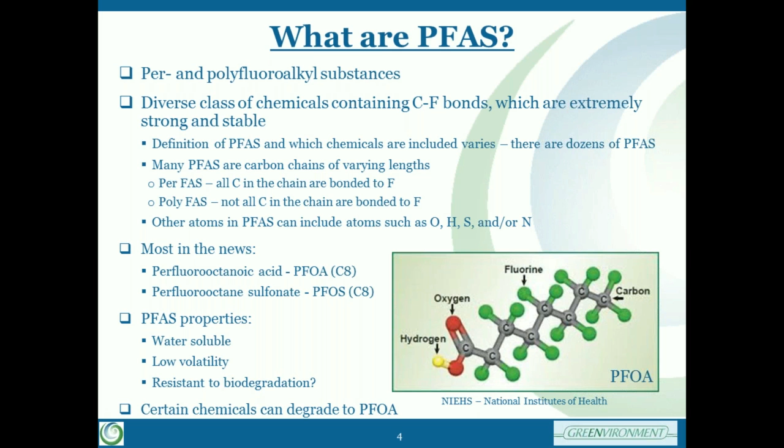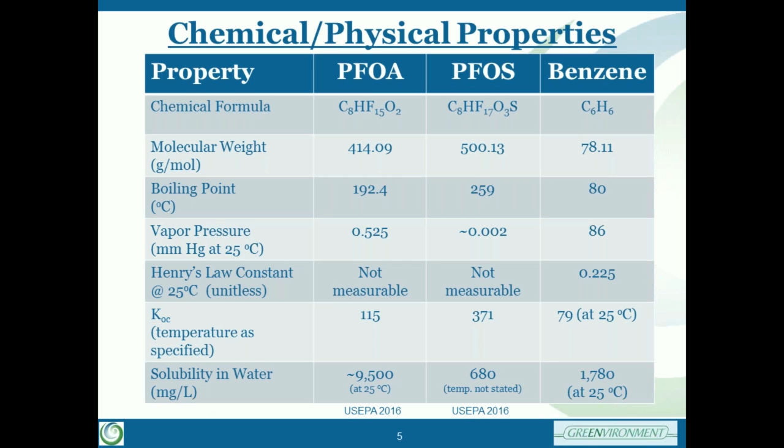KOC is a partitioning coefficient measuring the adsorbed concentration divided by the dissolved concentration. And you can see that the KOC values are greater for PFOA and PFOS than benzene. So benzene adsorbs pretty well, so PFOA and PFOS would tend to adsorb even better to things like carbon. And then finally, PFOA and PFOS have solubilities on the same order of magnitude as benzene, so this suggests that these chemicals are going to dissolve into water, which they do.

PFAS are widely used in our modern life. They are resistant to heat, oil, grease, and water, so they have a lot of applications. They're used in industry and consumer products since about the 1950s. And the products usually contain a mixture of PFAS chemicals of varying lengths and impurities.

So you may be familiar with Scotchgard and things like that that are used to waterproof clothes, non-stick cookware, Teflon that is in sampling equipment, takeout containers, a lot of different products. It's also used for wire insulation, in paper and paints, firefighting foams. You can hear about a lot of sites that are caused by firefighting training areas, and they're also used in carpeting and furniture.

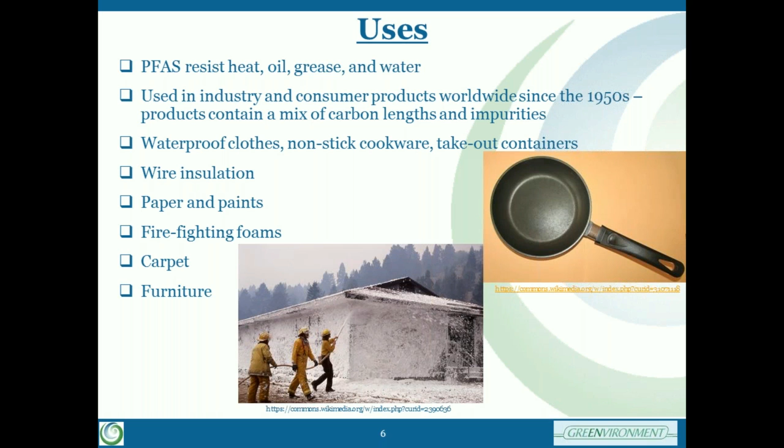PFAS are found worldwide in the environment, wildlife, and humans. They're even found in the Arctic and Antarctic. And a 2015 study showed that PFAS were found in 97% of human blood samples that were tested.

The widespread occurrence really came to light as a result of Safe Drinking Water Act testing just a few years ago. And PFAS were found in 66 water supplies serving more than 6 million Americans in 33 states. And these cases had at least one sample at or above EPA drinking water health advisories.

Now, concentrations of concern are very low for these chemicals. And as a result of that, it's common to see large dilute plumes of PFAS at concentrations exceeding safe levels. So it's an extremely challenging problem just because of the sheer volume of water that's involved often.

And there are a lot of difficulties in sampling due to the need to get down to low levels and to avoid cross-contamination from things like Tyvek suits or Teflon sampling gear. So a lot of care has to be taken to get good samples.

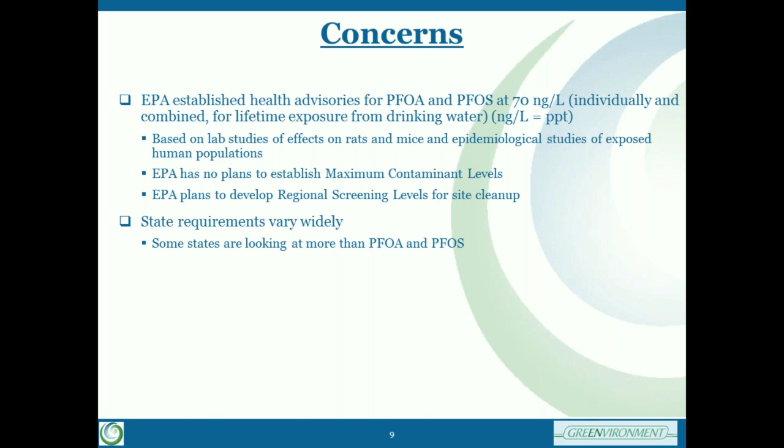So now Mike is going to talk about the technology toolbox and what is available for remediating PFAS. Thank you, Ellen. Again, as one would expect, there's a lot of research and development that's still ongoing with regard to PFAS, and therefore what we're presenting basically is the current state of technologies as we understand it.

As Ellen mentioned earlier, because of the molecular weight of the PFAS materials, some of the filtration processes and reverse osmosis processes are capable of high percentage reduction in their chemical concentrations in water, greater than 90%. And we'll talk a little more about that in the following slides. Similarly, as Ellen pointed out, some of the characteristics make it amenable to adsorption or ion exchange, and we will talk a little more about those in detail in the following slides.

Obviously, excavation and disposal is always available for these. Again, the disposal, because of the stable nature of these contaminants, you need to look at something that's got high energy to dispose and destruct the chemicals of concern. And in situ stabilization, again, with regard to isolating it from the environment with regard to leaching.

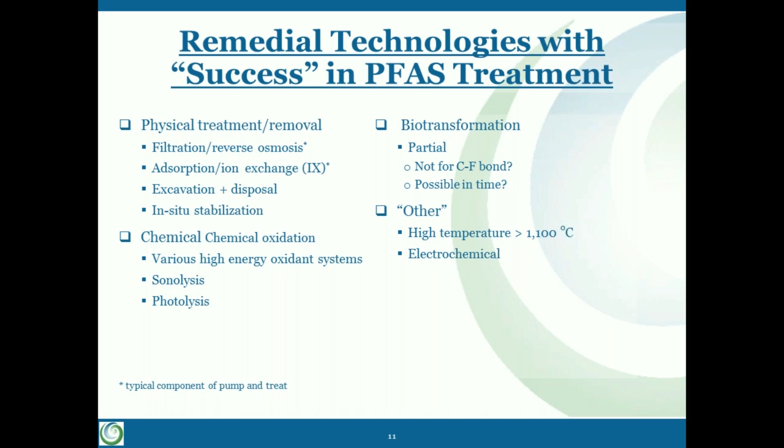Some of the other technologies, as you would expect, high energy technologies such as high temperature will obviously destroy or break down these PFAS materials. Obviously, you'll end up with fluorine, fluoride, that has its own issues to deal with, but these can be broken down under high temperature conditions. Another, again, high energy conditions such as electrochemical, where they've used mixed metal oxide anodes in the groundwater samples and been able to destroy, break down, and form the fluorine fluoride breakdown products.

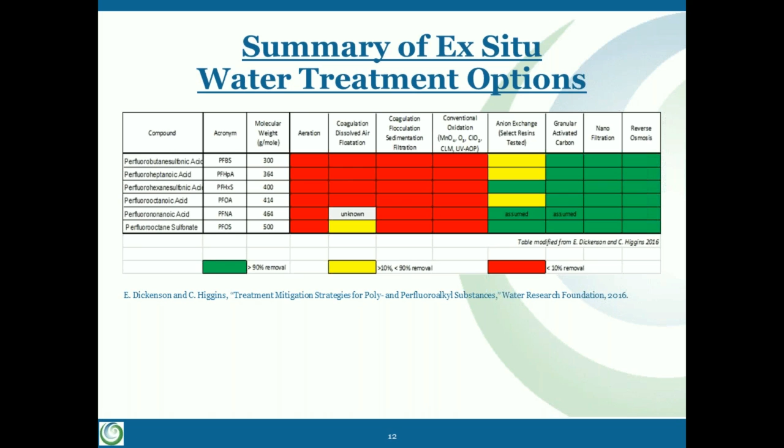I'm going to talk in a little more detail about three different technologies before I transfer over to Raymond. We'll talk a little about filtration, a little about adsorption, ion exchange, and a little about the chemical oxidation in a little more detail.

With regard to filtration, I'd mentioned the molecular weight cutoff, the definition that is typically out there, that defines the molecular weight in terms of Daltons, which is about 1/12 the mass of a carbon atom. And so because they're fairly large molecules on the order of 300 to 500 Daltons, and nanofiltration typically will be able to filter out anything more than 200 Daltons, it can be very successful. Now, ultrafiltration and microfiltration don't have that level of reduction capability because the filters are larger, but nanofiltration has been shown to be greater than 90% effective as an ex situ treatment technology.

Similar to reverse osmosis, the polymers that are typically involved in the formation of the filters again have larger capacity to remove higher molecular weight compounds, and again they're expected and have been demonstrated to be greater than 90% effective for most of the PFAS materials.

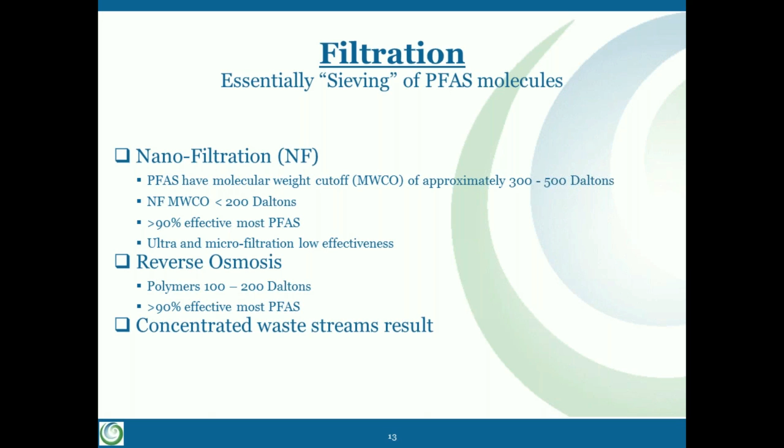The one thing about this technology and also the adsorption-based technologies is you aren't reducing the PFAS material, you aren't causing them to be transformed. They've essentially been retained, and you're reducing a waste stream. And those waste streams, depending on the methodology, can be significant volumes still relative to the original stream, and you do have a concentrated waste stream that you need to deal with. And again, people are researching different techniques. Obviously, thermal techniques can be used, but also some of these electrochemical techniques and other techniques that can be used to destroy these concentrated waste streams.

Adsorption and ion exchange, I think, is very interesting. Again, a non-destructive technology, but I think it's predominantly the go-to technology for today. What we're looking at: carbon-based systems, obviously, predominantly we've got ex situ activated carbon GAC systems, and as I mentioned here, it's the current go-to approach. And there are a number of in situ injectable carbon-based systems that are out there also.

Again, the caution obviously with these systems is that basically you're removing it from the water, but it is a reversible process. There is a capacity limit, and therefore you have to be aware of the design to make sure that you're covering enough product to basically absorb the mass flux that you're dealing with over the time frame that you want it to act for in situ.

There are other non-carbon-based systems that are predominantly clay-based or a blend of absorbents. Clay is combined with other absorbent materials such as RemBind or MatCare. And there's ongoing research looking at zeolites as a potential absorbent for PFAS. The R&D is really focused on the fact that these are very cheap. Zeolites are very cheap. They're naturally mined. And therefore, if they were to work and have decent absorption capacity, they could be competitive to some of the other absorption technologies.

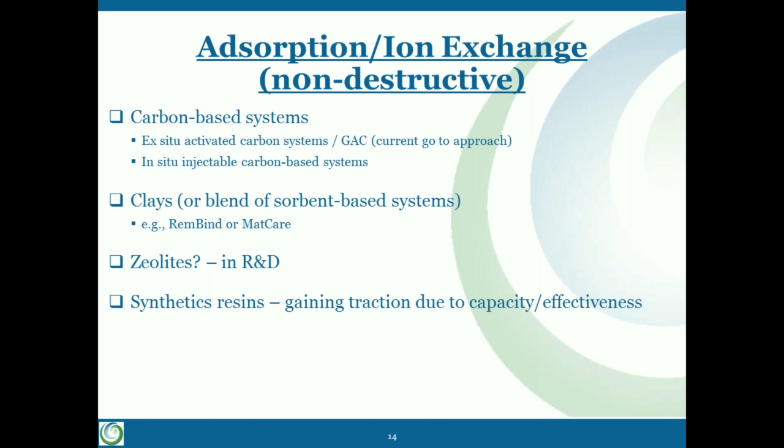I think one of the most interesting is the research that's going on with synthetic resins. And so that, which we're going to talk about in more detail in the coming slides, is gaining a lot of traction, predominantly due to the fact that you can manufacture these resins to be absorptive of a number of different chemicals, including PFAS materials, and therefore you can generate a lot more capacity and effectiveness with these resins. They're typically going to be more costly on a pound-for-pound basis, but definitely have attractive aspects too.

Next slide basically does just a general comparison for carbon-based systems versus these ion exchange resins. Again, not all carbons are created equal. Basically, the source makes a difference, the manufacturing process makes a difference as to the capacity for absorption, the uniformity of the absorption surfaces, and the hydraulics of flow within these carbon beds to make sure you're maximizing the contact with the active sites. It's been proven. It's the technology that's out there as the go-to. It's been effective at multiple sites throughout the country and definitely been considered and used for these point-of-entry treatment systems.

Regeneration, again, it absorbs the PFAS, so the carbon is going to be regenerated. Typical regeneration is at high temperatures in excess of 1,000 degrees centigrade to destroy, in quotations, the PFAS, because again, we don't know how much destruction is occurring. We know that we're not destroying fluoride or fluorine, but are we forming byproducts or breakdown products that need to be considered? That's still an area of question with respect to some of these removal technologies that are still out there.

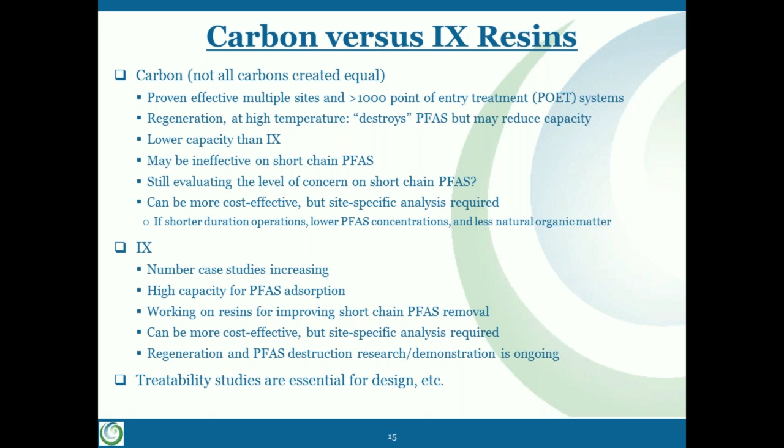Treatability studies are essential for all these technologies, regardless of carbon or chemical oxidation, because there's such variety of PFAS materials out there. There's such variety of natural materials in groundwater and in soils, obviously, that can affect these processes. So treatability studies are essential. Even for a simple carbon system, it's recommended that you would do treatability to determine the right design, right loading of these compounds.

A couple of slides provided by Steve Woodard of ECT Squared, who basically is in the leading front with regard to the resins. And I know he's working with a number of universities out there and other entities, basically continue looking to improve the performance of the resins and to incorporate other blend of materials, non-resin materials, into, again, take care of the wide variety of chemicals that are coming through in these groundwaters.

So this is an example comparing the Filtrasorb, which is a Calgon Carbon product, to the resin, this particular resin Sorbix. And it's a 5-minute empty bed contact time in these ex situ reactors, and both are very effective at removing the PFOA in this particular case down to very low levels. The difference, again, as we talked about, is the capacity.

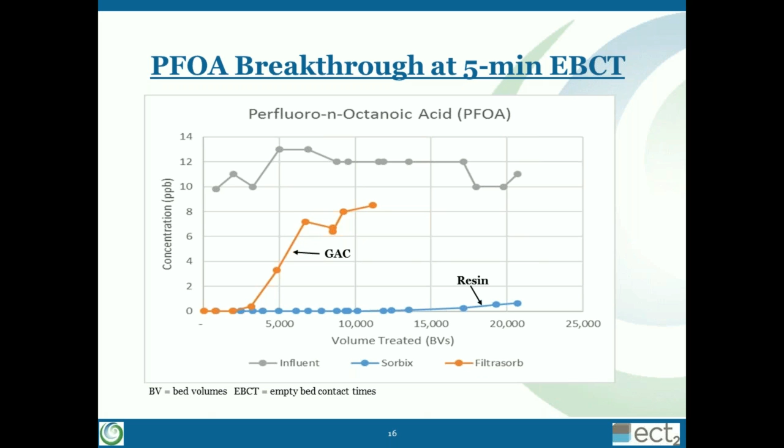You can see that the resin is capable of retaining, without breakthrough, for about 15,000 bed volumes, whereas the activated carbon will get breakthrough in a few thousand bed volumes. Still substantial, but a significant difference and needs to be factored in the overall costing of the process.

Similarly for PFOS, again, the influent concentration you can see is about 25 parts per billion. A very similar story. The resins are very effective over a much larger number of bed volumes, whereas the carbon, again, is very effective, but has got less capacity before breakthrough occurs.

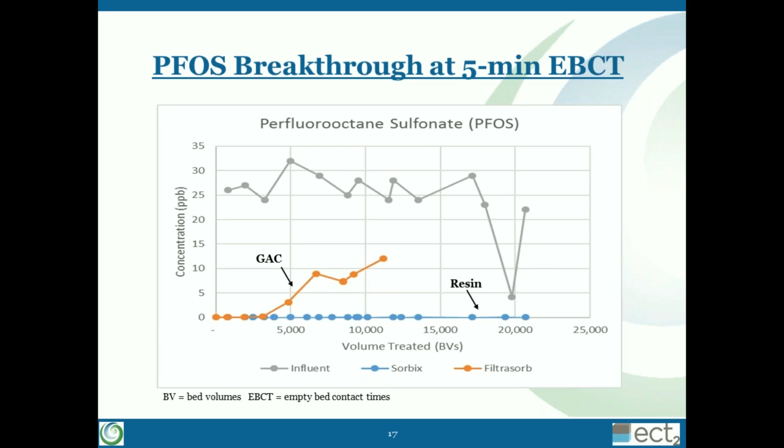This is from the same study, basically looking at a mixture of PFAS materials coming into both the carbon reactor and the resin reactor, which are split off from the feed. And again, you can see a similar story in that the resin, as expected, would have a much greater absorptive capacity, much larger capacity for bed volume throughput versus the carbon.

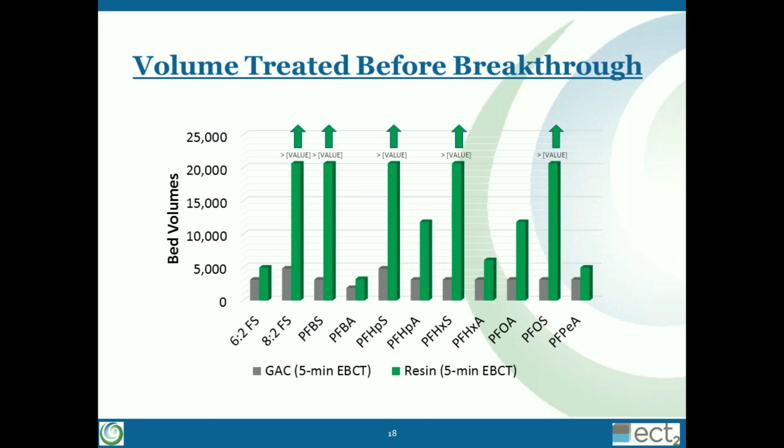What's also interesting from this slide is the variation in the absorptive capacity, in particular for the resin, for the different PFAS materials. And I think that's one of the reasons why the research is ongoing, looking at combinations of resins mixed with non-resin material that can be more consistent on the high level capacity for the treatment of PFAS.

One of the benefits, again, of the resin is you're not regenerating it at a high temperature, and therefore its regeneration capacity is expected to be pretty close to the original capacity, and that's what this particular slide shows. It shows that once regenerated, the resins have a very similar capacity.

One of the interesting things I learned from talking to Steve about the technology is it's not just an ion exchange process that's occurring on these materials. It actually is a combination of absorption and ion exchange, for chloride ion for the ion exchange portion. But there's also quite a bit of absorption going on because of the structure of many of these PFAS materials.

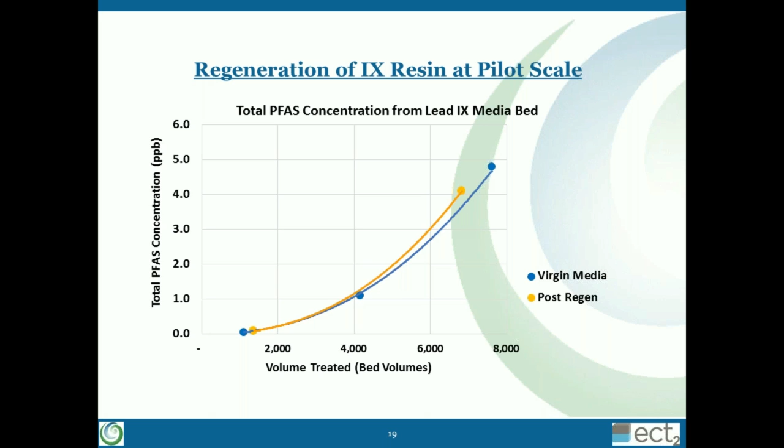One of the things that Steve mentioned is in trying to regenerate, if you use just a typical brine wash, it's not going to work very effectively because of the absorptive portion of the PFAS materials. And similarly, if you just use a desorbent like methanol, for example, you may not get effective regeneration because you may not affect the ion exchange portion. So very interesting, and a lot of research ongoing in that area.

My last slide before I turn over to Raymond, who will give you some specific case studies on the use of chemical oxidation. Several bench studies, including work by XDD and others throughout the country, both at the university and practitioner level, have been focused primarily on PFOA and PFOS, because those are the ones, as Ellen mentioned, that are most in the news, but they've also been dealing with other PFAS materials. And generally, there's been partial success to full success in these bench studies.

There's a lot of practitioners out there who at the moment are publishing on their particular blend of oxidant or oxidants that are having success. And there's quite a few of them that have popped up in the last few months. I've seen 2 or 3 new publications associated with different combinations of oxidants.

The common theme that I've seen in the chemical oxidation approaches is that the higher level of success has been observed when using more complex chemistries. In other words, combining oxidants such as ozone and peroxide, or ozone, peroxide, persulfate, or persulfate with heat activation, or persulfate with alkaline activation, or peroxide activation.

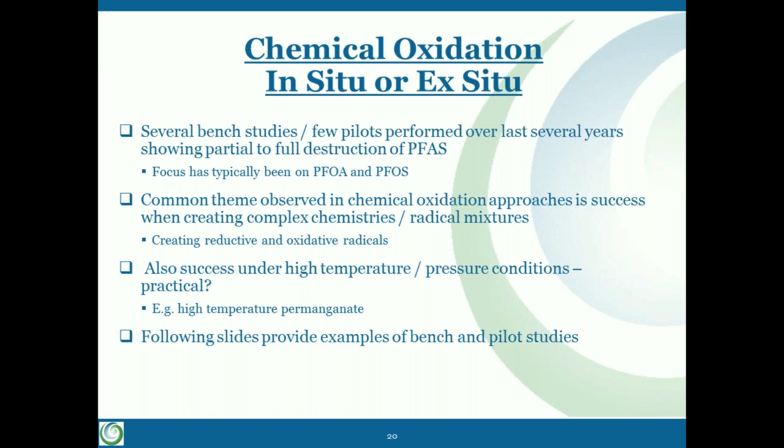Thanks, Mike. The technology I'm going to talk about is called OxyZone. OxyZone is a peroxone-activated persulfate-based oxidant mixture. OxyZone has been in use now for several years on more traditional contaminants, chlorinated solvents, petroleum hydrocarbons. It's been used in and around buildings. I should say that it is applicable both in situ and ex situ as a technology.

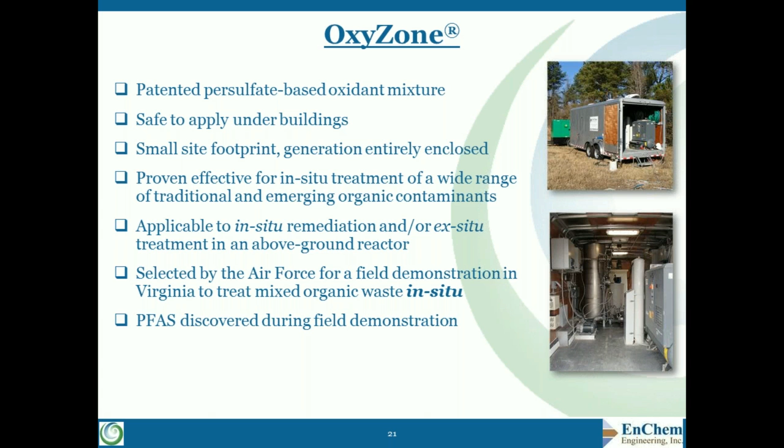And more recently, our work was focused on an Air Force base where we were looking at treating a mixture of organic waste in situ. And it happened to be at a fire training area. And of course, at the fire training area, lo and behold, the PFAS compounds were detected. Fortunately, we detected those early on in the study, and then we tracked those throughout the study. The study was basically a field demonstration of the technology, not designed to completely clean up the fire training area, but to test the technology and demonstrate that it could be used to treat mixed organic waste.

And this is the start of the case study. The site was in Virginia at Joint Base Langley Eustis. There was a history of using aqueous film-forming foam at the fire training area. On this slide, it's an aerial view of the fire training area. Within the fenced area was where this fire training area was. The investigation that we did at the beginning of the study showed that we had several chlorinated organic compounds, of which trichloroethane was the dominant compound.

There were other compounds, petroleum-related compounds, and there were actually 9 detected PFAS compounds. At that time, the analysis for PFAS could detect 14 compounds, and we actually found 9. PFOS was the dominant compound of those 9 PFAS compounds. The ranges that were found of PFOS and PFOA are shown here in this figure. And I should say that there was residual NAPL, primarily as trichloroethane, throughout this site. So the PFAS that we were tracking was in the presence of much higher concentration organics. Again, the PFAS here is in the parts per billion range, and you have the other contaminants that were in the milligrams per liter range.

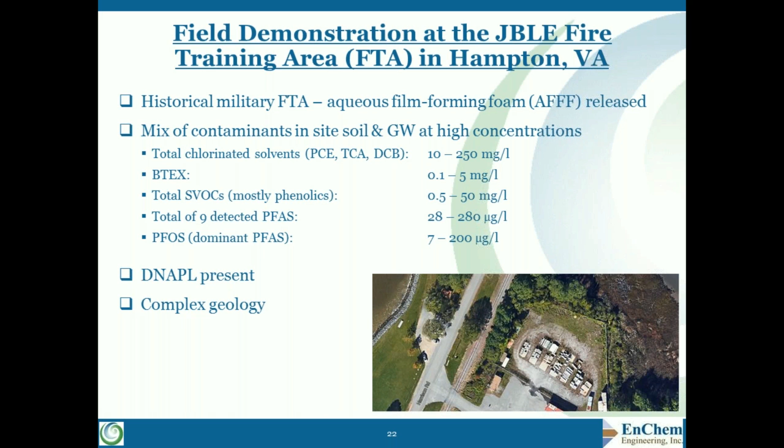I should say that the geology was fairly complex at this site. Next slide. At the beginning of the study, we did a membrane interface probe investigation to see what we were up against. These are some of the results showing the distribution of primarily chlorinated organic compounds, detected using membrane interface probe with a photoionization detector. On the left-hand side of this figure, you see a plan view on the top and an isometric view on the bottom, and that is the pre-injection results. On the right hand of the slide, again on the top, you see the plan view and the isometric view post-injection results.

So this slide is showing you from the groundwater surface, which was very shallow, approximately 2 feet below ground surface, down to about 24 feet. What this slide is showing is a great reduction in the overall amount of chlorinated mass after the injections. Again, the idea was to demonstrate the technology, not to clean up the entire site. The time and budget wasn't designed for that. But this shows a very large reduction in the overall chlorinated mass as a part of the study.

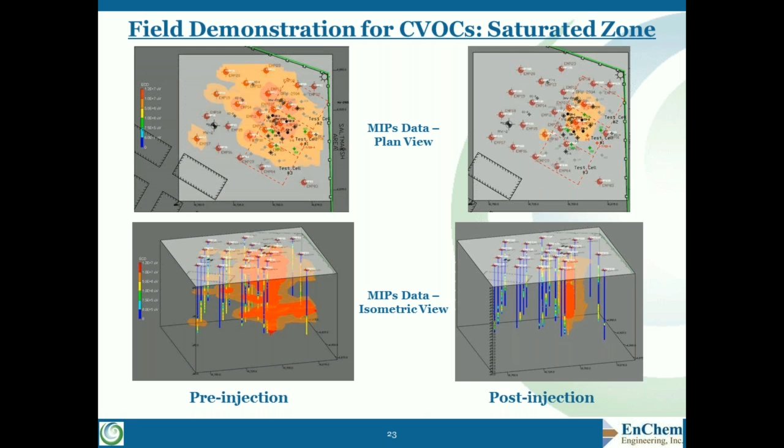This is then focused on the PFAS reduction throughout the study. The upper slides are tracking PFAS compounds, the 9 detected compounds, from the pre-injection to the post-injection. And then on the bottom of this slide, we're showing PFOS only. PFOS was the dominant compound of the 9 detected PFAS compounds.

So what you see, and these are isoconcentration contour maps. The warmer colors, the reds, are higher concentration. The blues are the lower concentration. So in the upper sequence, you see pre-injection, some orangish colors, then post-injection, 2 months post-injection, and then 6 months post-injection, you see going to more blues. The injections occurred, you see down at the bottom of the slide, in the late April to August period.

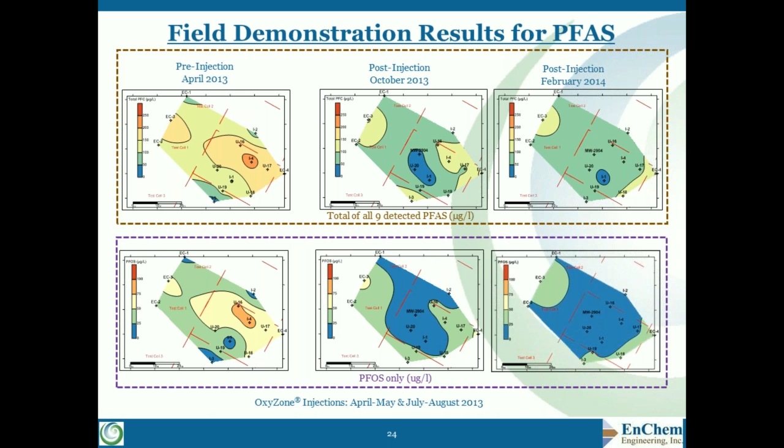The lines that you see in there, this was all looked at relative to a test cell. The test cell was approximately 20 feet by 25 feet. And so in the course of the study, we looked at all the concentrations from within the test cell as compared to outside of the test cell. Most of the oxidant was contained in the test cell, and so the comparisons later on were done inside the test cell versus outside the test cell.

The field demonstration results for PFAS, when you think of it in terms of a lines of evidence approach, what we found was a 21 to 79% decrease in the total groundwater concentration of the 9 detected PFAS within the test cell. PFOS was the dominant compound, and we had the greatest reduction in groundwater concentration of all the PFAS.

The other thing we found is by doing a statistical comparison of all the data from within the test cell to all the data outside the test cell, we found that the PFAS concentrations decreased within the test cell, but not outside the test cell. It was also found that the groundwater concentrations, based on the conservative tracer chloride, showed no dilution impact from the injections.

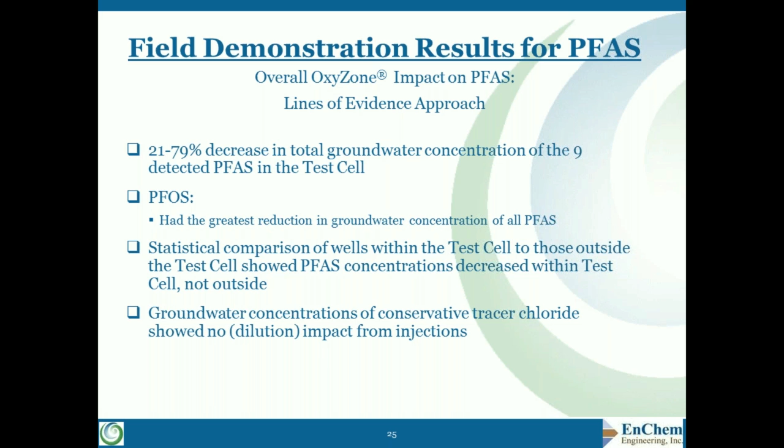So after we did the field demonstration test, we went back and tried to convince ourselves using bench testing that what we were seeing in the field made sense and that we actually could destroy PFOS and PFOA. All of this work was conducted between 2013 and 2015, very early on in the discovery of the whole PFAS problems. So we went back and did bench scale testing, and what you see here is some of those early results. We've done much more work since then, but these are some of the very first results.

So in the upper table, you see deionized water spiked with PFOS and PFOA. And there's a little bit of impurities in those, quote, pure compounds. But what you see is a very good destruction using the oxyzone technology of about 99%. And then in the table below that, you see spiked groundwater. It's actually PFAS water spiked with PFOS and PFOA and treated with the oxyzone.

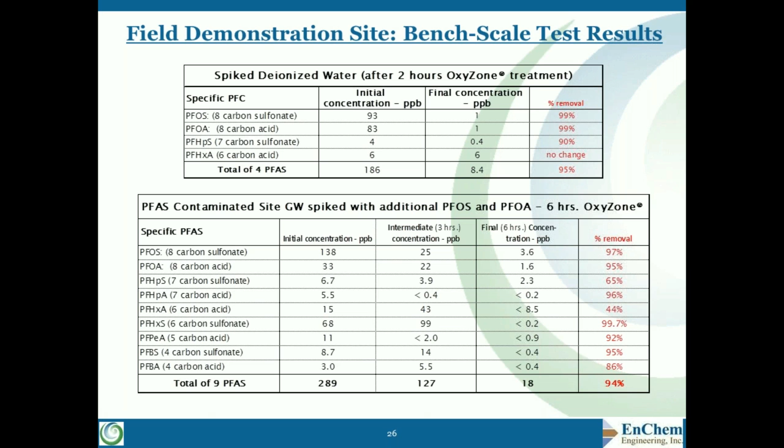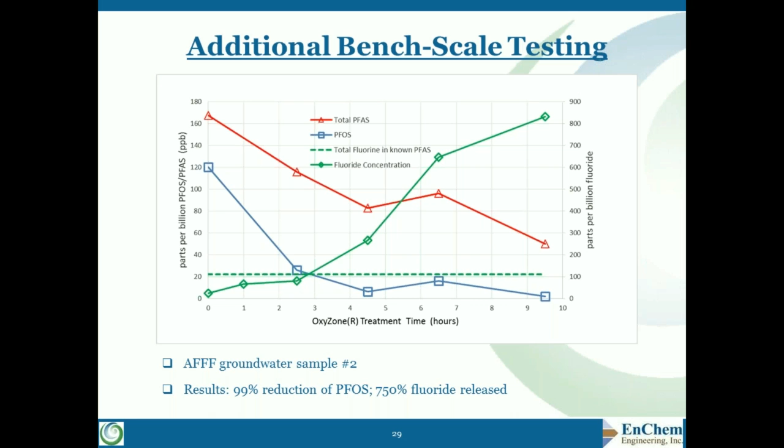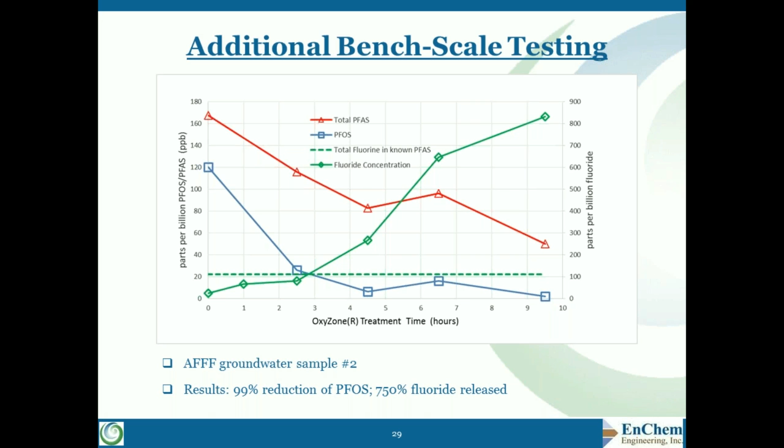And then in this test, this is another AFFF groundwater, same kind of test where we are tracking fluoride and comparing it to the theoretical fluorine in the total of the 26 known compounds that could be analyzed. Here you see total PFAS decreasing, and you see that the fluoride concentrations this time increase above the total fluorine, to about 750% fluoride mass recovered. So this is indicative of many more compounds than the 26 that could be analyzed, generating a lot more fluoride mass than the 26 would lead you to believe.

So in summary, the field demonstration technology was based on MIPS. The idea was to demonstrate the technology for destroying mixed organic waste, and also track, as it turned out, 9 PFAS compounds throughout the testing. The data suggests that we were destroying both the mixed organic waste components as well as PFAS in the presence of residual NAPL.

And then based on bench scale testing conducted after the field test, we see a decrease in PFAS and an increase in fluoride anion, demonstrating the positive proof that we can actually destroy a wide range of PFAS compounds. The testing that was just shown was not optimized per se, but it is believed it can be optimized, and that these PFAS compounds can be destroyed to very low concentrations.

And finally, I would just talk about how we see the technology being used. We see it perhaps in a source zone of an AFFF fire training area, for both in situ and ex situ treatment. It could even be used to supplement an existing pump and treat system, where granular activated carbon has already been installed. Our technology can definitely be fitted to an ex situ reactor, and of course it can be used for in situ treatment. We also see the technology being used for in situ treatment in a dilute plume area, using either vertical or horizontal wells.

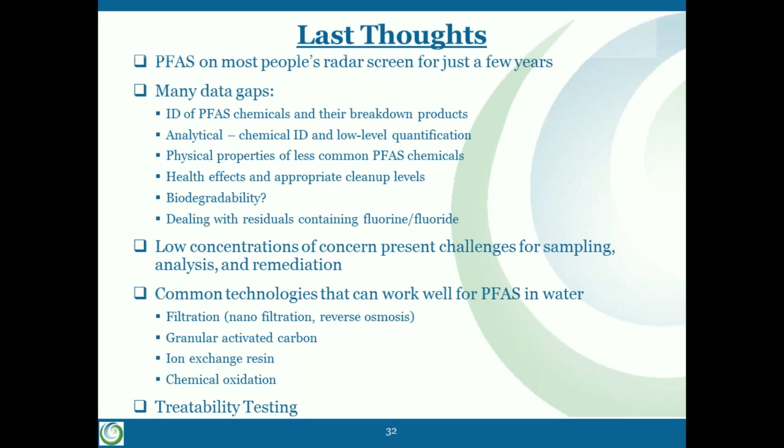There's a lot going to be learned over the next few years as we continue to do research and development in this area. I would re-emphasize, not just because we have a treatability lab, but because it's necessary for design purposes, that treatability testing is an important part of this, to make sure that you're not creating something worse and that you're able to achieve your objectives, which themselves are still developing.